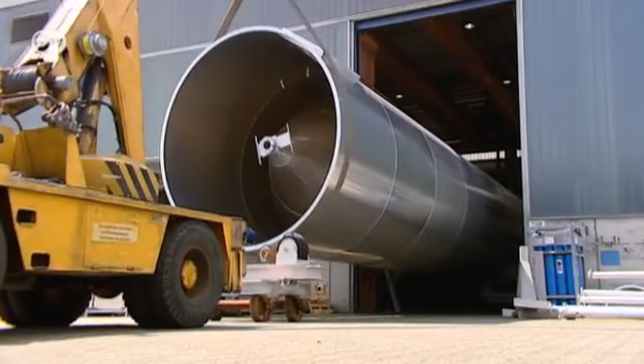One of these silos costs 50,000 euros. Most of the customers come from China, Saudi Arabia and Russia. They're from companies that make plastics and recycle them.

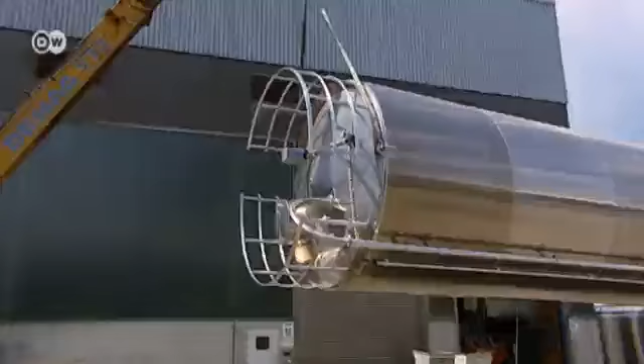The order books at Zeppelin Systems are full. Surprising, given that more and more people here in Germany are talking about a crisis. We're all used to that in Germany. Other countries see things differently. In the US, you'll see a kind of optimism that is perhaps exaggerated, with no realistic basis to it. And here, we're sometimes pessimistic, but without a realistic basis to that either.

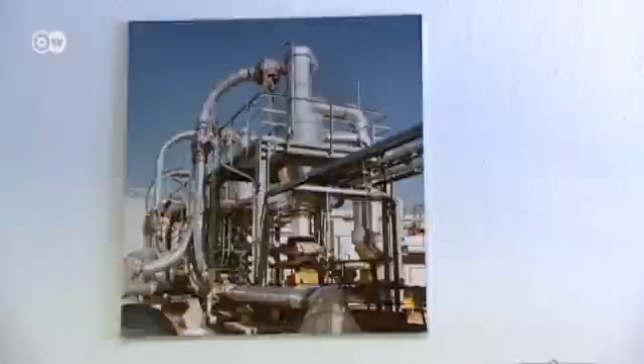70% of the production plant components end up abroad. For the engineers here, those components include pipes, tanks and silos - massive systems, sometimes several hundred meters long. By the end of the year, another 20 systems will leave the factory here, at a value of around 100 million euros.

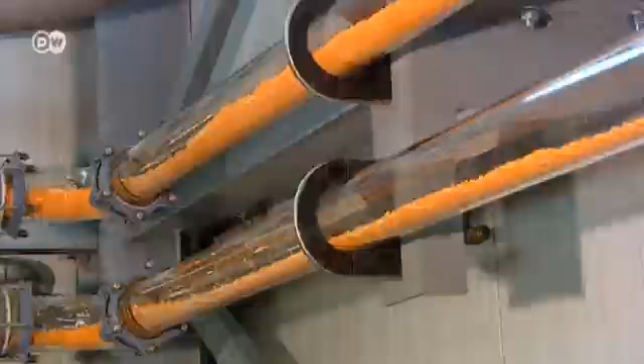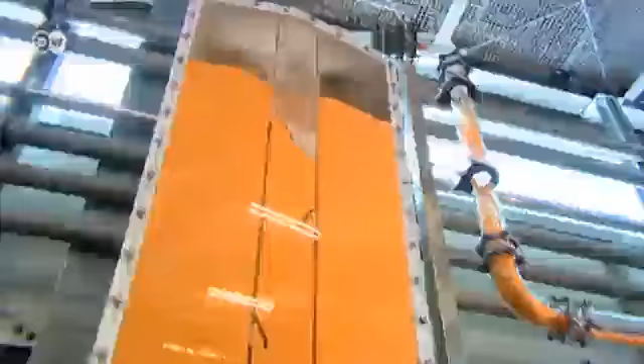In this test plant, plastic pellets are being transported. But if they move too slowly, they could block the pipes. If they're transported too quickly, they could melt or be damaged. Then they form threads like this - we call it angel's hair. These threads cause production problems in the processing, resulting in an inferior end product, which we want to avoid.

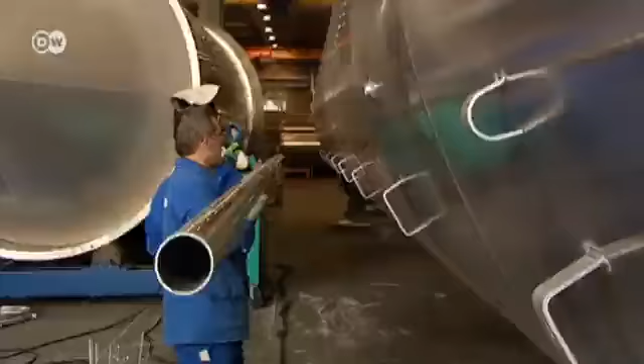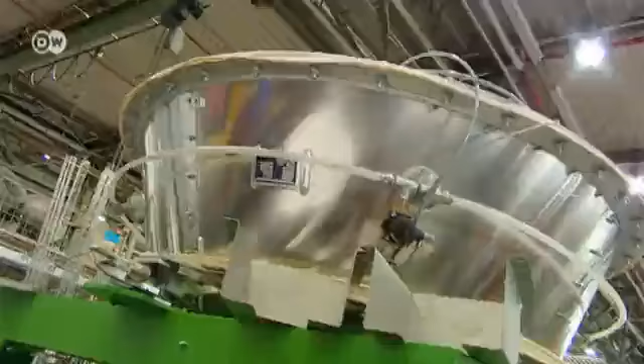Back at the production hall, many workers are on summer holidays. That leaves the rest of the workforce doing overtime. There's little sign of an economic crisis here, even though the last Zeppelin downturn wasn't that long ago.

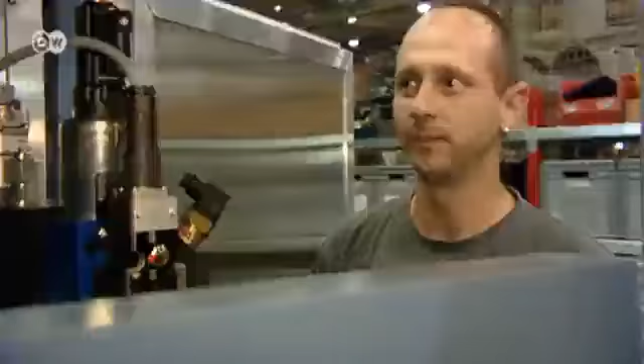We asked the workers if they worried about a crisis. Let's put it this way - we'll see what happens, I'm not going to worry about it. It helps not to hide, we have to get on with it. What else can you do? We'll see how the economy goes. We can only do that by holding our heads up and not burying them in the sand.

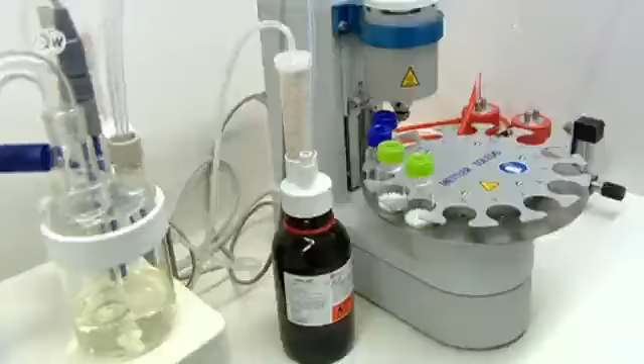The aim is to be prepared for the future, and Zeppelin Systems specialize in innovative environmental technology, building plants for recycling rubber tyres, for example. They want to enable tyre makers to extract raw carbon black from old tyres for the manufacture of new ones.

A ton of carbon black costs more than 1,000 euros. If tyre manufacturers use 10 to 20 tons an hour, you can imagine the cost. If we find a way of producing carbon black from the waste, that would be a huge success. The management estimates such a breakthrough could bring in more than 50 million euros in sales.

Their only concern is that the euro may let them down. It would be critical if the euro collapsed. A replacement Deutschmark would probably appreciate in value, but that would raise the cost of our products abroad, and we'd see an international slump because of the turbulent currency.

But for now, the mood here is generally optimistic. They have faith in a saying that the inventor of the Zeppelin used a century ago: all you have to do is believe in it, and it'll work.